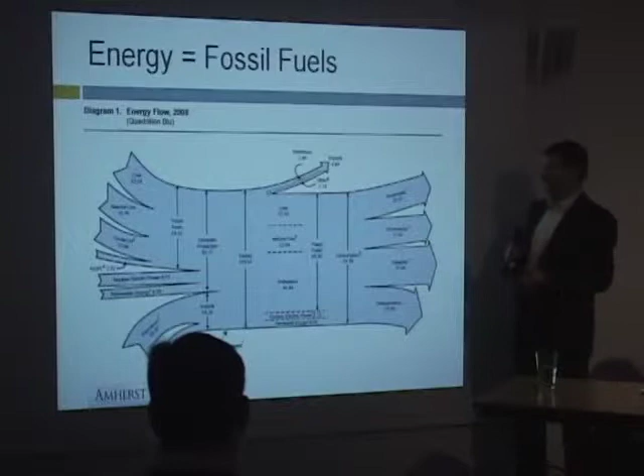Isn't this a lovely graph? This is the Department of Energy. This is our tax dollars at work. I absolutely love this thing. We could stare at this for hours, and I do.

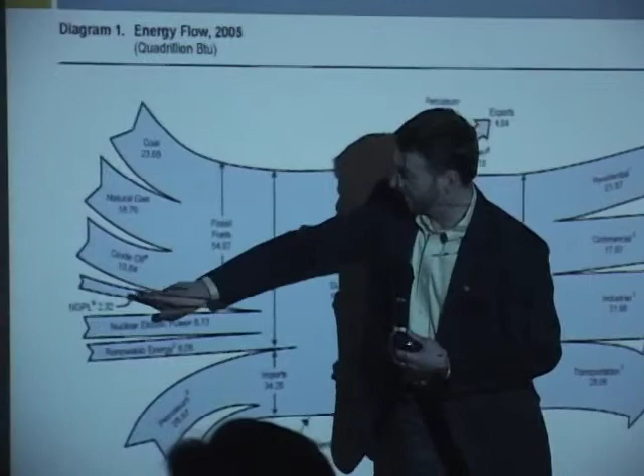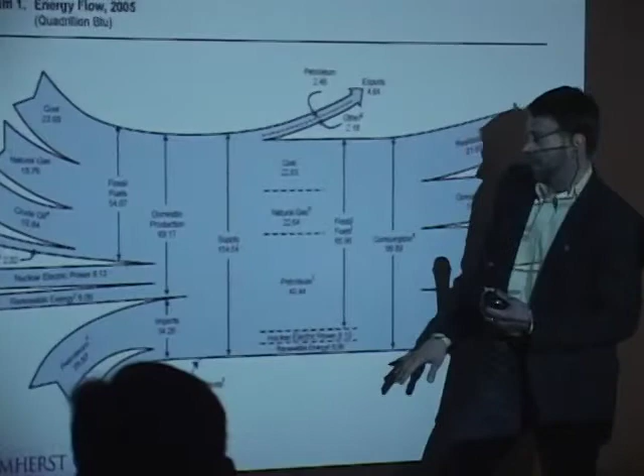But what this shows you is where the energy is coming from over here. These are all the various energy sources: coal, natural gas, crude oil, natural gas liquids. Nuclear is that little arrow there. Renewable energy is that little teeny thing right there. And this is petroleum down here. So this is domestic production, 70% of the input to the process, and that's imports. And then it shows where it's going.

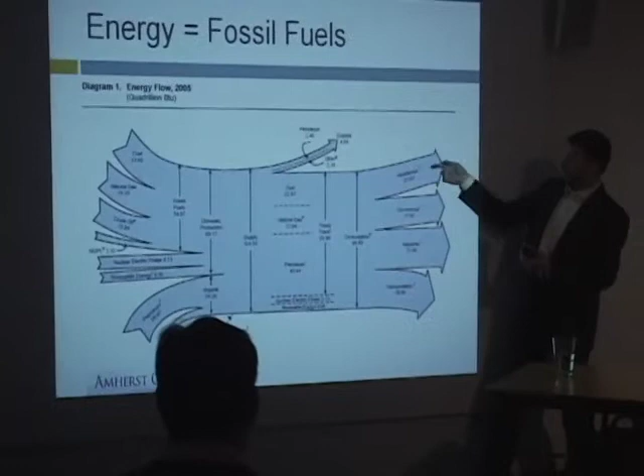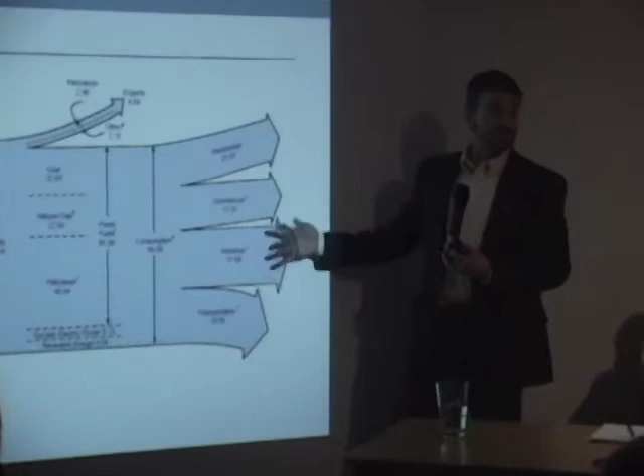Residential, commercial, industrial, transportation - that's what we're doing with the energy. Those four sectors are roughly equal, with industry being the biggest. We still actually make things in the United States, believe it or not.

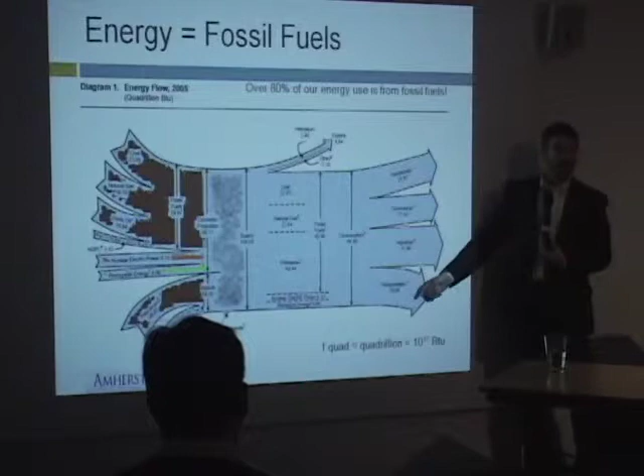But the important thing here is if you color the input, the brown part of the input is fossil fuel. That's kind of sobering - most of the input to our energy process, which does everything we want to do (live, work, make, move), is fossil fuels.

What do we use the energy for? If we take the right side of the graph, the output of our energy use in this country, there's those four almost equal sectors: residential, commercial, transportation, industrial. But most of those are buildings.

Residential, that's just about all buildings - that's your homes. Commercial, that's all buildings too, that's where we work. Industrial, a lot of that energy is maintaining the building the stuff is being made in. And transportation has no buildings, because most of our buildings don't move.

So when you really look at it, most of our energy consumption, 48% of it, is in our buildings. If we want to do something about energy, about greenhouse gases, we have to do something about buildings. I'm sure you guys already know that.

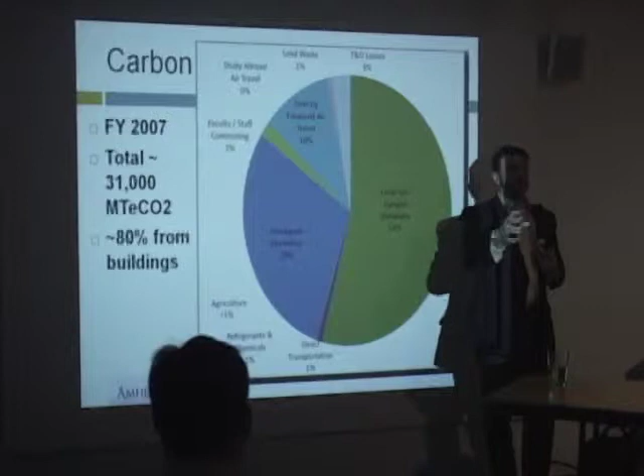This is what happens to the energy. Most of the energy we use, as you could see from that left side, is fossil fuels, hydrocarbons. So here's a quick chemistry lesson - I hope there are no chemistry professors in here.

Most of that energy comes in the form of hydrocarbons. We want the hydrogen - the hydrogen is what gives us the energy off it. We're left with the carbon. The carbon combines with the oxygen in the atmosphere and makes CO2, which is a greenhouse gas.

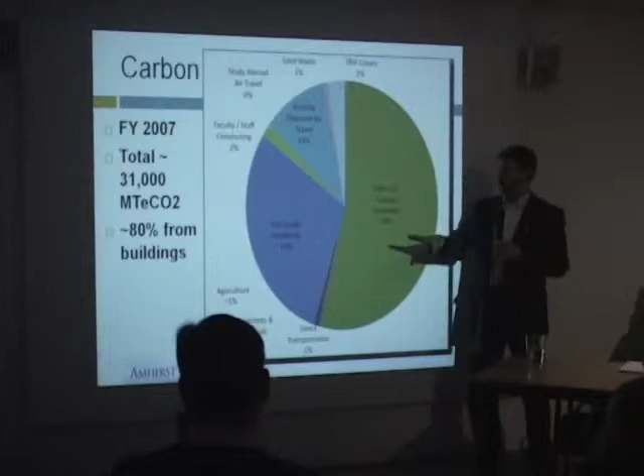This is our greenhouse gas footprint at Smith College: 31,000 metric tons of CO2 a year. It's almost impossible to visualize that, but let's just say 31,000 tons of a clear, tasteless, odorless gas is a lot. It's a big thing.

But most of it is from burning fuel on campus to heat the buildings - 54% of it. 29% of it is created by the plants we buy our electricity from. Everything else, all the little mowers and trucks driving around campus, is 1%.

Agriculture, meaning the greenhouse gases from the stuff we use to kill weeds and keep the grass green, is less than 1%. Escaping refrigerants and other chemicals is less than 1%. All the people who commute to Smith College from towns in the valley are 2%.

Our professors, who jet all over the world going to conferences in Tahiti and recruiting students from all over the world, that's 10%. That's big - that's a lot of jet fuel we buy. But most of it is the buildings.

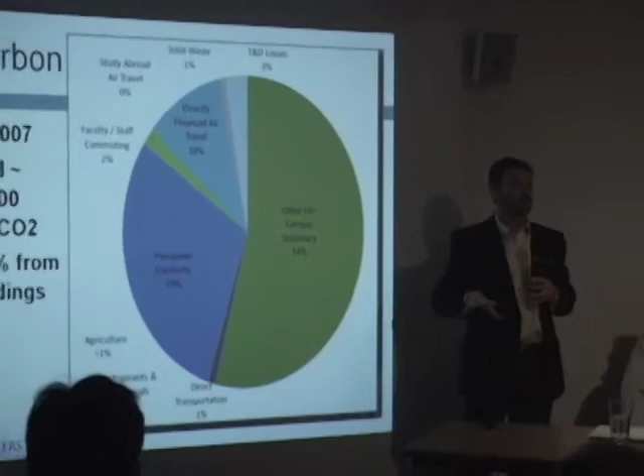So to do something about our greenhouse gas footprint, Smith College has committed to get rid of it all, to go carbon neutral. They have signed the American College and University President's Climate Commitment, which is to go carbon neutral. You've got to do something about your buildings primarily.

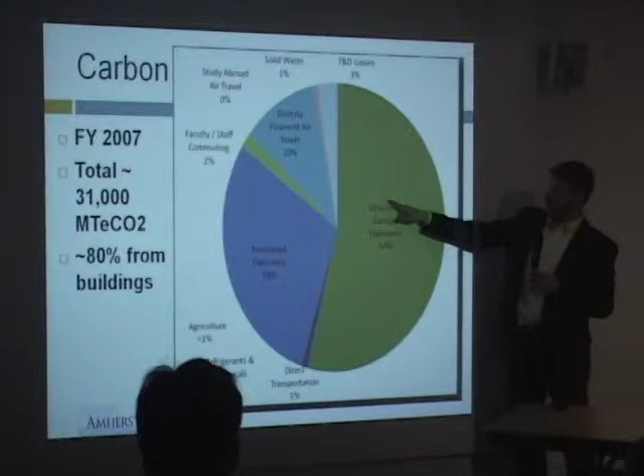So one of the things we do is green buildings. I'm going to switch things here and show you a quick movie, because the students I get to work with are far more talented than I am.

I'm Todd Holland, the energy manager, and we did some work in this building, the new residence hall. I'd like to talk about the solar hot water system and the energy-saving shower heads.

This is a LEED Gold certified building, the highest standard being platinum. Originally, the building was supposed to be silver certified, but we did so well during the design process that we got enough points for gold.

One of the biggest energy users in the building is hot water, and most of the hot water in the building is used for showers. A good portion of the hot water in the building is made by a solar hot water system.

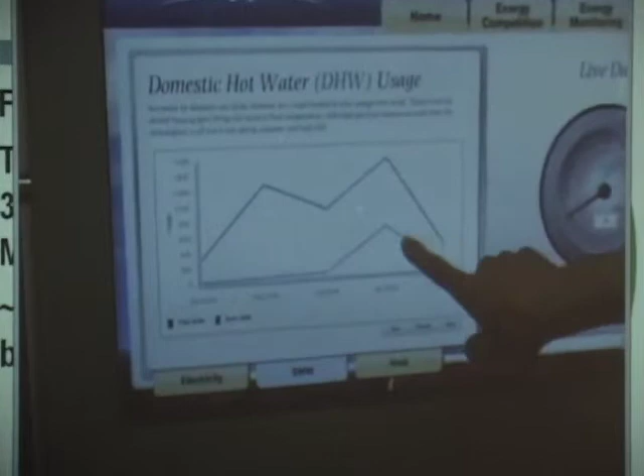There's 24 panels on the roof, and we can see its performance over time. On this day, this is the line - it was a sunny day a few days ago when we made about a little more than a third, almost a half.

I did all my own stunts. And you'll notice the camera work was nice enough not to focus on my helmet head after riding my bike to work on that summer day.

That's our newest residence hall at Mount Holyoke, which hadn't built a residence hall for years and years. The illustration there got a little garbled, but we have a solar hot water system on the building. That building at Mount Holyoke was our third LEED project.

The first LEED building was a science center, and a science building is an extremely heavy user of energy. In the category of energy and atmosphere, that building got only 2 LEED points, the prerequisites, and no more. So we learned from that and went after energy hard in the residence hall. It actually triggered a renovation of the Science Center, and we installed some of the features in the science building that were originally value engineered out.

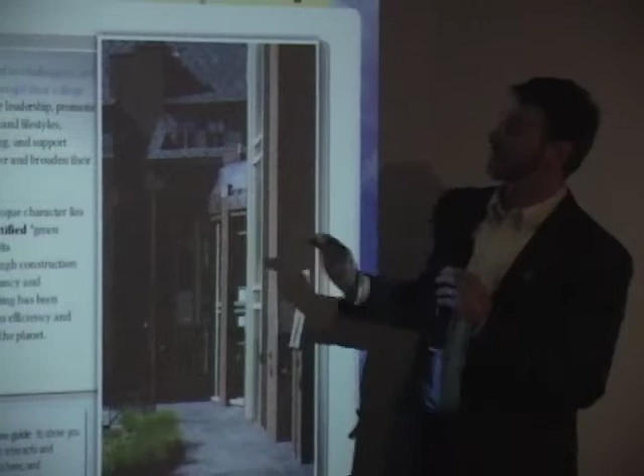Back to the building, I'll show you something else that didn't work too well. In the movie we have this little thing, our green touch screen. If you go into the lobby of that building, you see that nice touch screen, which actually doesn't flicker like that, that's just a video effect. This explains all about the LEED building, and you can go through and pull up any of these tabs.

We have an energy competition where we can compete floor to floor. It explains all about electricity, where the electricity comes from. You can read about the boiler plant, the boiler power, find out about the Mount Tom coal plant, see how much mercury that puts in the air here. But students don't use this thing, they don't care about it. I was really happy to write all this stuff and had a great time, but it really needs to be a little simpler. The basic idea is that this was a dashboard you could walk into the building and see how much energy we're using.

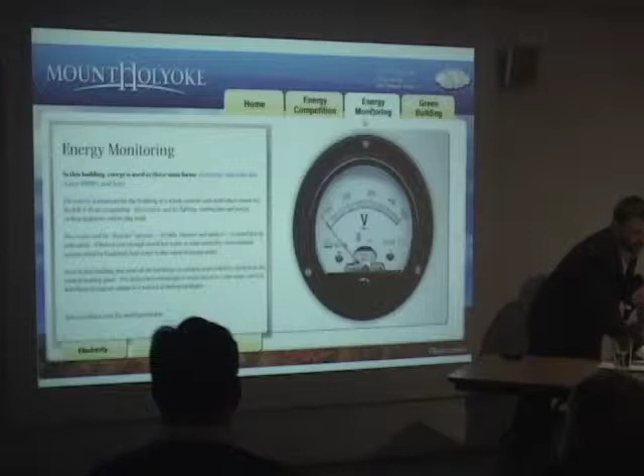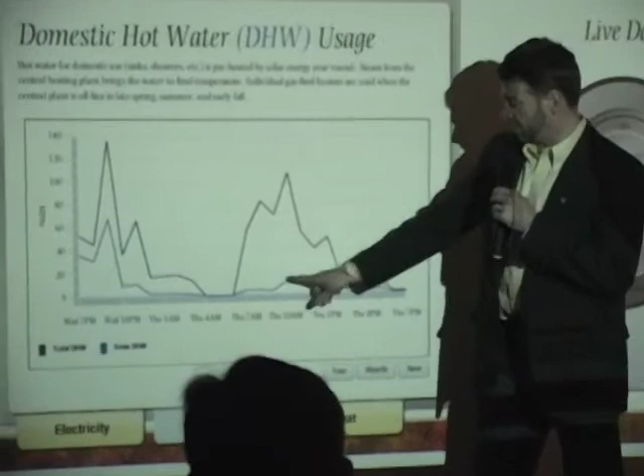So if we wanted to look at the solar hot water, we click on that tab, and this loads the screen shown in the video. It shows that yesterday we had a lot of sun, it was a nice sunny day. Today, not so much, a little cloudier. Wednesday we were using this much hot water, but we made that much of it, which is really nice. Right now we're not making any, really, we've got a little residual in there. But it also lets us find out interesting things, like dormitories in colleges don't really do much until about 10 o'clock at night.

And this is every day, and that's every system. Students shower at 10 o'clock at night, they turn everything on at 10 o'clock at night - that's when you really start cranking. This is kind of interesting.

That was my dream for this, that they'd want to go move the needle. But at Oberlin, they had an energy competition. They gave them the orb as the display device and told them nothing. I tell students you can find out how to change your light bulbs and put your computer to sleep, but they told them nothing. They figured out one of the biggest electricity users in the dormitory was the clothes dryer, so what did they start doing? They'd break into the dorm next door and do their laundry in the middle of the night over there.

So this was a lesson learned - over-providing. And back to the PowerPoint.

But the greenest building, I think, isn't building a new dorm - that's also kind of an ironic thing. Mount Holyoke really needed a new dorm. They didn't have any quote-unquote swing space, so if they wanted to renovate a building, they were forced to do it during the short summer months. Every project renovating 150-year-old dorms was packed into a summer and had to be ready by September. So as major issues came up - major mechanical retrofits, asbestos abatements and the like - they needed a place where they could put students and move them out for a whole year and spend a year fixing a building, which is something that Amherst College does.

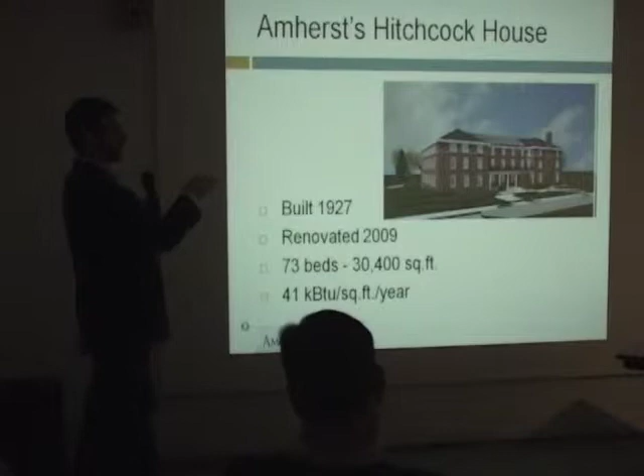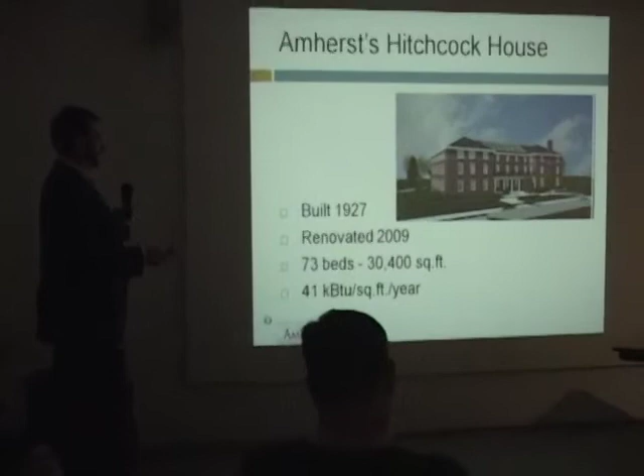The one completed this summer did quite a bit better. That's not a real photo, right Tom? Nope. Okay, yeah, there's no red keg cups on the front line. That was opened in September. It's a little bit bigger, 73 beds, but look at that - it's kicked the energy use down to 41,000 BTUs per square foot per year.

This is Mount Holyoke, and one thing really nice about Mount Holyoke is it came in really close to what the modeling said it would, which I was thrilled about. It was a brand new building, built from the ground up. It's a rather large dormitory, 172 beds, and that's down to 36,000 BTUs per square foot per year. But again, none of these places have kitchens.

But this is what you'd expect, right? If you took your house and took the kitchen out of the equation, maybe you'd cut almost half the energy out. This is how the building would have looked if we just designed it to code - most of the energy used per year would be space heating, similar to what you find in your house in the Northeast. Lighting and electricity makes up a good chunk, and then hot water for showers. What we got was 40% lower than code. That's pretty good, although I know Bruce and other people are making stuff that's 10% of code, so this is good, but it's certainly not in the realm of what's possible.

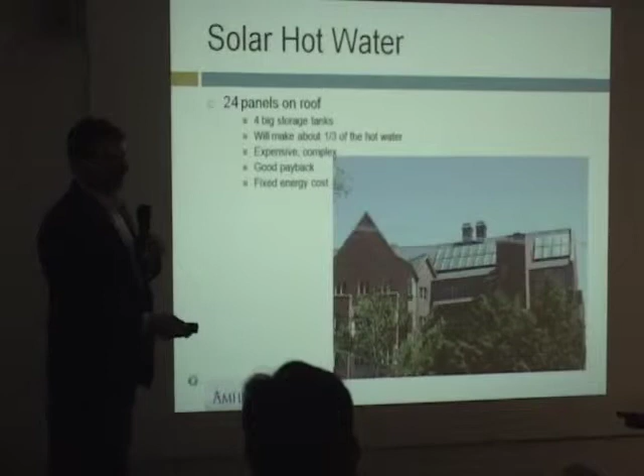Again, solar panels on the roof - the kind of green necklace that everybody wows over - but the real showstopper there is the shower heads.

Conway House, this was built in 2006. This is a small apartment complex for non-traditional age students at Smith who have families, so this is a real residence. It's an 11-unit residence, people living in there, and they have a full kitchen. So this is a real residence house, and that's down to 34,000 BTUs per square foot.

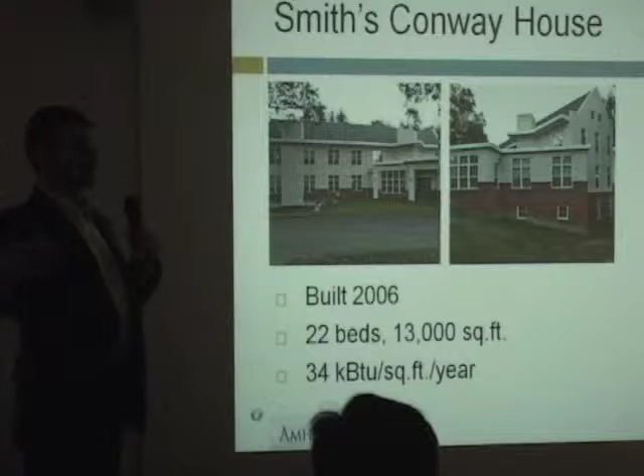This is a thermal vault. It's built with 12-inch SIP panels, which is a sheet of foam with plywood glued on either side. Really nice on this type of housing because the walls aren't hollow, so bugs and rodents have no place to hide. It's easy to seal tight, and it's really easy to hang a picture because it's plywood behind the sheetrock - you don't have to find a stud, which I'm notoriously poor at.

So that's down 34,000 BTUs per square foot per year. Just to go to some even more awful slides besides that first DOE slide, I made some really pathetic ones - never do this in PowerPoint.

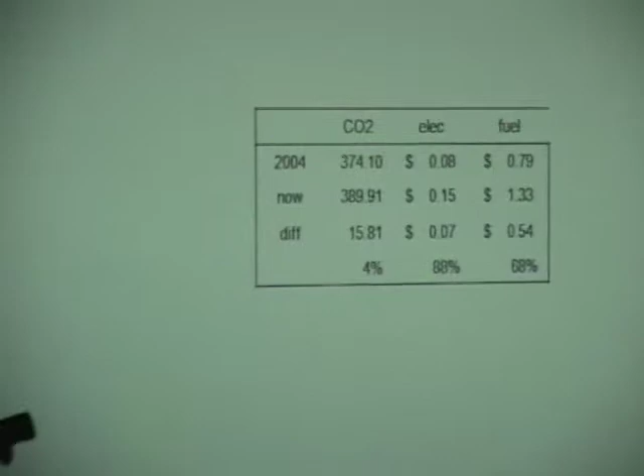So what's been going on since 2004? I've been at this a little more than 4 years. The CO2 in the atmosphere has gone up 4% - 4 years ago we were at 374 parts per million, now we're at 390. Electricity doubled in cost for the colleges, which was amazing. One thing that amazed me is it didn't make my work twice as important. Fuel more than doubled and has since gone back down - back when I first started we were paying 79 cents a gallon for the ugly, dirty fuel oil we burn at the colleges. Can you imagine that? Now we're paying $1.33 a gallon. So electricity almost doubled, and fuel has gone up by more than two-thirds.

What else has happened? This is very interesting. Notice the difference between BTUs per square foot per year average on the campuses - at 185,000 BTUs per square foot per year, paying attention to the residences, which are well under 100, is probably not where the treasure is. Amherst College has dropped their BTUs per square foot by 14,000, for an 8% reduction. Mount Holyoke has dropped theirs for a 6% reduction, and we're doing a lot more than just building green buildings or retrofitting the spaces we have. Smith has taken a whopping 16% reduction in BTUs per square foot per year.

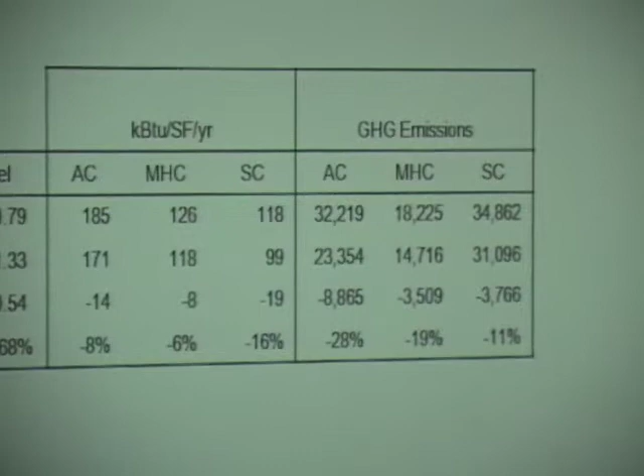What's happened to the greenhouse gas emissions? Amherst College has reduced theirs by 28%, only spending money on things that make money. A lot of that is cogeneration - we're making electricity on campus now. Instead of throwing away the heat like a power plant does, warming up the Connecticut River, we use the heat on campus. Mount Holyoke has reduced their greenhouse gas emissions 19%, and Smith has reduced it by 11%. So it's not all green buildings - most of it is doing other things: finding where the power is being used, finding egregious waste of power, and retrofitting the buildings we have.

Thank you, Todd. That was great. How do we convince people to change the way they live? That's one of the big questions, I think.

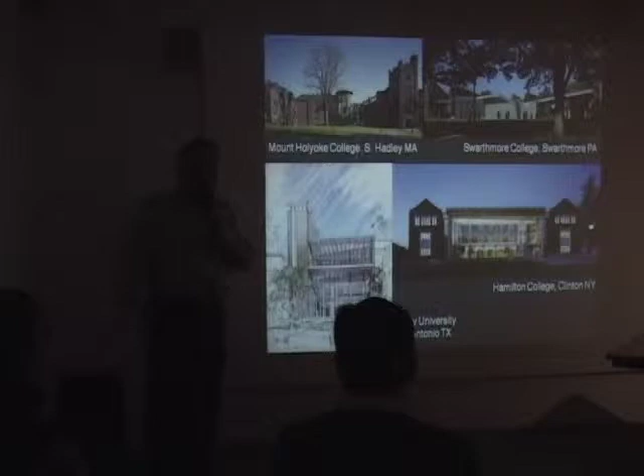These all have something in common, although as you can see, they are very different buildings. First, they're all reshaping of existing buildings with major insertions of new construction. Secondly, they're all between 100 and 200,000 square feet in size. Thirdly, they all have a green agenda, and it's a different green agenda in each case, and I'll talk a little bit about that. But most importantly, they are buildings for learning, buildings that are intended for the learning of science.

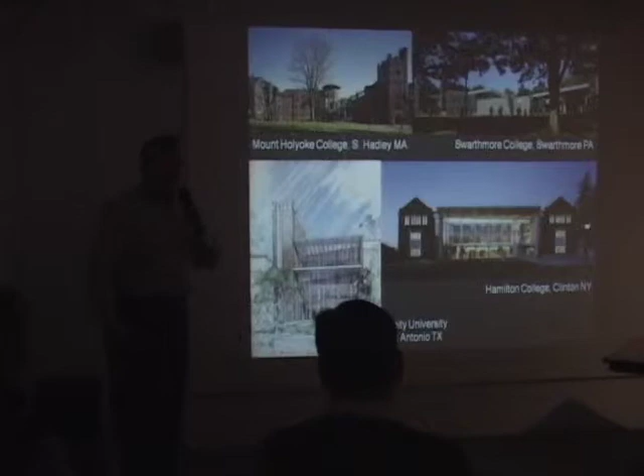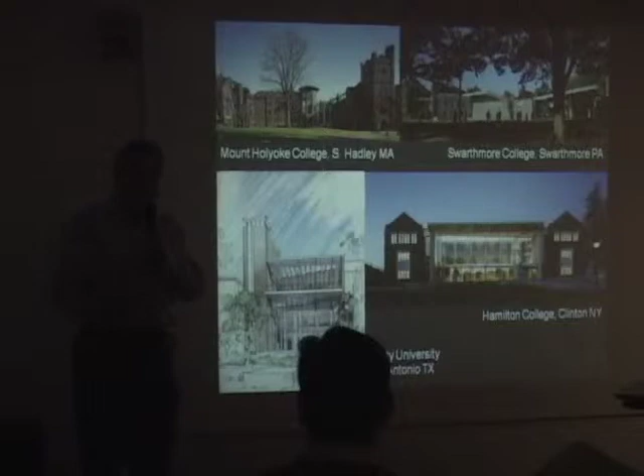And what does that mean? The learning of science and science itself has changed quite dramatically in the past 50 years since most of the original buildings were built. Most of them were built between 1930 and 1960. There was, of course, a big building boom in college campuses in the 50s and 60s after the Second World War.

But science has changed in many ways. Firstly, science was considered in the mid-20th century as disciplinary: physics, chemistry, biology, psychology, and so on. Nowadays, all of the advances in science, or most of them I understand, are at the intersection of the disciplines. So interdisciplinary work is a vital part of modern science. Think of neuroscience, think of biochemistry, think indeed of environmental science. So these buildings are intended to bring the sciences together.

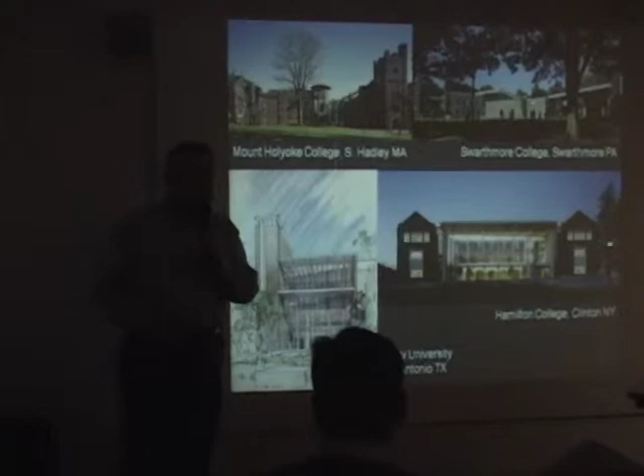Secondly, science is learned in a different way nowadays. Students learn not by doing what I did when I went to a lab in University College Dublin a long time ago in the 1960s, doing a prescribed experiment laid down by a professor. Nowadays, students learn by discovery learning. They are doing experiments themselves that they are thinking of, and they're imagining what the implications of what they're thinking of will do. They're learning by trying and by experimentation.

They work in teams rather than individually, and often interdisciplinary teams. So creating places for people to work together is a very important part of science.

Science has changed because the emphasis on safety is great now, and therefore the emphasis on ventilation of buildings, particularly chemistry buildings, where the science is about handling what are volatile organic compounds. So the building must be ventilated, and as Todd said, they're great energy users, therefore the opportunities for saving are great.

Finally, just as in every other aspect of our lives, information technology has a huge impact on the learning of science. Instrumentation has become very sophisticated and available to almost every institution, quite sophisticated scientific instrumentation, and of course all the obvious ways that information technology affects our life.

So I gave myself a challenge because I said I'm going to talk about 4 buildings in 15 minutes. Meg told me she was going to be forgiving about the time, but I think I owe it to her to speak fast, so I will continue to do so as much as I can.

First, and one last thing: the program on all of these buildings is basically the same. This is the basic program of an undergraduate science building: teaching laboratories, research laboratories, offices, support, instrumentation, and classrooms, all tied together by perhaps the most important space in the building, which is the social space. The design of that social space is just as important as the design of the laboratories or classrooms, because that's where the students learn from the faculty, learn informally, and do a lot of their work, as you will see.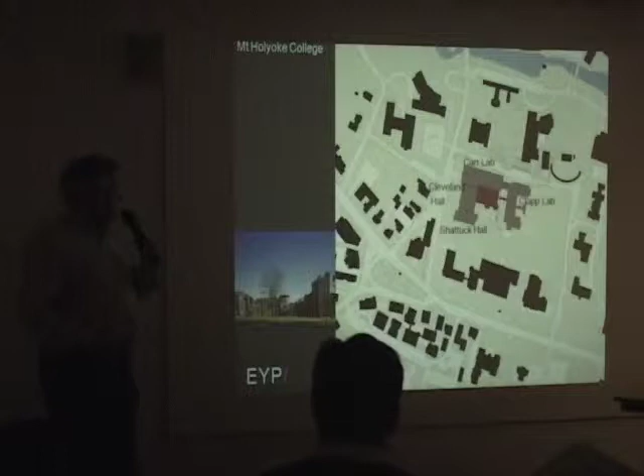The red rectangle encloses the new construction, which primarily consists of the atrium, the central space that ties the whole thing together. A lot of the renovation money went into the

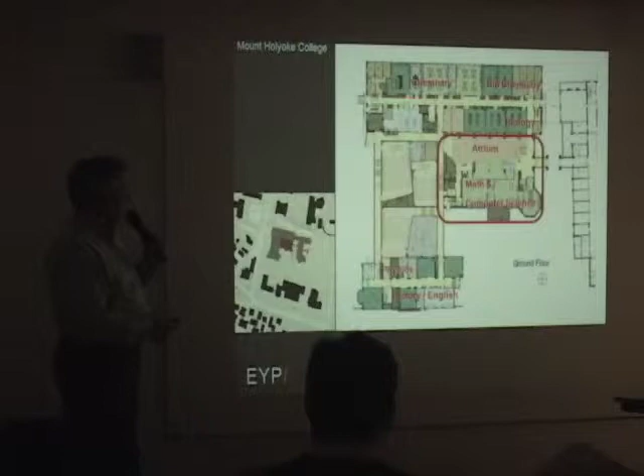chemistry laboratory here. This is the atrium, which is very tall and narrow because it had to link all levels of all the buildings. Clapp Lab, which you can see through the window in the distance, was four stories, so we wanted to link all levels because we didn't want to leave anybody isolated from the central social space.

The other lesson about this space was it needed to be very active all the time. It needed to link with all of the other activities going on in the building—you can barely see some windows looking into the chemistry building here, and all of the space on this side is activated, so you can always tell there's things going on. It's a very important space, the heart of the science complex now.

We also made some overt efforts to learn in the building. This is in the linoleum floor—we cut in the solar system, so it makes a connection, a little bit of learning.

Here we cut in a diagram of a neuron. Apparently this is a firing neuron, and there's a trailing nerve that runs all the way down the corridor past all the offices and labs. Again, it's sort of a diagram of science on the floor of the building.

In the renovated chemistry building, we were short on space and the ceilings seemed very low, so we eliminated hung ceilings in the lab. That gave a slightly better feeling of height, and practically, it allowed access to the ductwork and conduits above. It also helped students understand the amount of energy going into this building as they look up and see these pipes, ducts, and wires—this huge amount of things happening to make the study of chemistry possible.

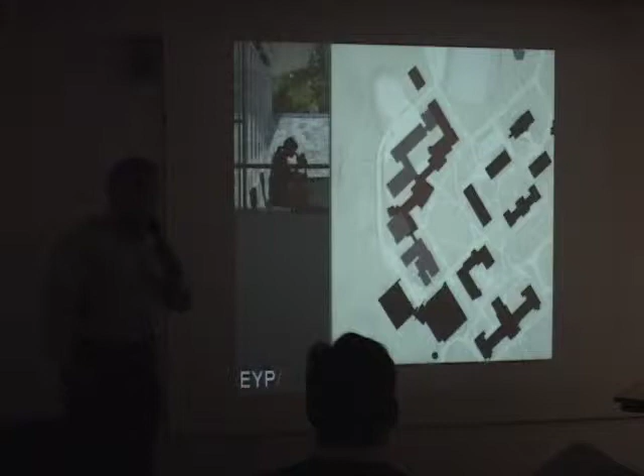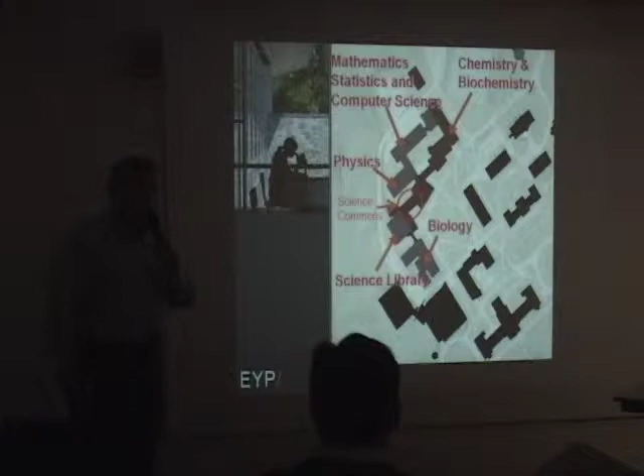This building served all the different science disciplines and connected them to one another, and also had a science commons—a social space analogous to the atrium at Mount Holyoke—in the center, the kind of center of gravity of the space.

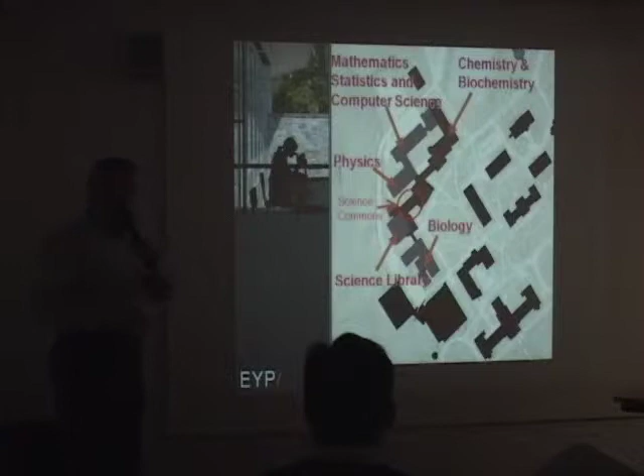You saw on the site plan there's lots of courtyards and ins and outs in the building, and that was very conscious because we were trying to connect the building to the outdoors, so no matter where you were in the building, you had a very strong connection with the outdoors.

There was an outdoor classroom, a number of these actually, and we also celebrated the natural rainwater coming down. Rather than sending it in a pipe, we put it in a channel so you could see the water coming down, and then it would go into a cistern where it was used to irrigate the campus. Even in the internal classrooms, large, simple classrooms with large windows, you had a connection with the outdoors.

And most of all, in the science commons, it had windows on both sides, so again, strong connection with nature. But also a very important place, the sort of heart of the building.

In this place, we also had an energy monitoring system, and the faculty was insistent that this was not going to be a digital readout, but rather dials, analog dials, so that you could understand the scale of what was happening. You weren't just reading numbers, but you were actually seeing the needle move up and down, and you could tell whether you're just moving 10% or whether you're moving that much.

This also gives you an idea of, if you are going to have an energy monitoring system, what are the units you're going to measure, and how are you going to measure them, and how is it going to be effective enough that it will be useful.

My observation is, and this is not a scientific study by any means, that these kinds of things are useful if they are connected with some kind of a curriculum. If they're just in the lobby for people to see, people look at them and yes, they're interesting, but I'm not sure they really react or respond or are really effective. We can discuss that afterwards, and perhaps other panel members have ideas. But this was an interesting version of an energy monitoring system that is fairly unique.

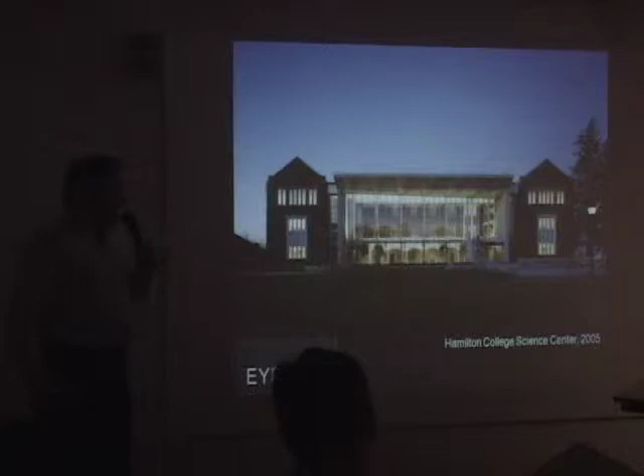Moving on, another science building in Hamilton College in upstate New York. Here the green agenda was again different, driven by the Board of Trustees. We started with the existing science building that needed to be reshaped, reformed. It wasn't serving the needs of modern science, it was forbidding and people didn't like it, and it obviously needed the normal upgrades that buildings always need at this level of age.

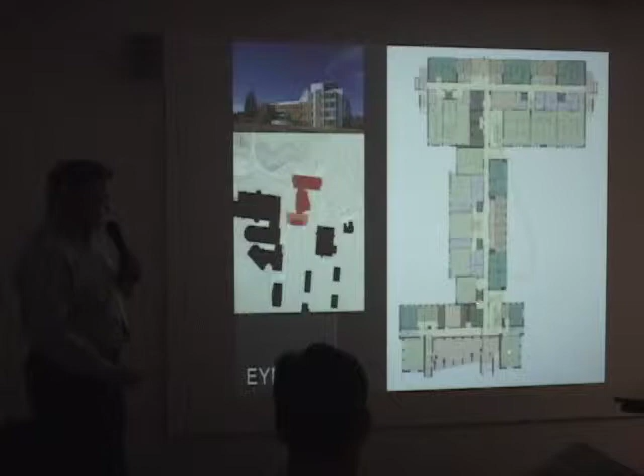We proposed to the board that we consider LEED certification. They were a little cautious, but they did want to make a green move in the building. This is part of a very big complex, so the existing building is just this piece in the front. What they decided was that the atrium, that little red piece there, would become an energy showcase.

What we did was design this atrium, which was inserted between the gables of the existing building, designed to be an energy showcase. I'll talk very briefly about pieces of it here. First, a big solar peak to keep out the summer sun. It is south-facing, and inside there's a double curtain wall.

From here up, the double curtain wall with the space between the two walls is used in the summer for gathering the solar gain heat and bringing it up and exhausting it, and in winter to gather this heat gain from the sun and recirculate it through the building.

But perhaps interestingly, at the end of the atrium there's an energy kiosk. You can see a picture of it here that explains the way the atrium works. It also explains the energy the building is using and does all those same things that Todd was talking about recording. The feedback is that this little feature in the corner of the building is interesting for visitors who press the buttons and look at it. Students mostly ignore it - they maybe look at it once or twice, and it's not incorporated into any curriculum.

So I think it's something to talk about in the discussion, the usefulness of these kinds of techniques. However, this building has had a very interesting impact in Hamilton, in that the administration and the Board of Trustees have realized the importance of environmental considerations in design of buildings. Although this building wasn't LEED certified, the three buildings they have built since then have been LEED certified. So it has been helping educate not just students, but all of us, in the importance of these considerations.

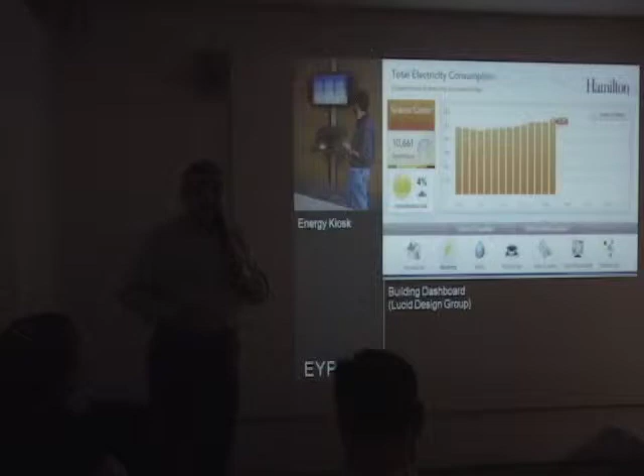Also, Hamilton has recently installed another kind of energy dashboard, this one by Lucid Design Group, and you can actually go online - I'll give you the reference afterwards if you want to see it. I did it myself yesterday. A number of colleges have installed this particular kind of building dashboard, and it measures electricity use, water use, natural gas. If there are renewables, it'll tell you the contribution renewables are making towards the energy consumption of the building. I think all of these kinds of techniques are important for us in the future, to help everybody have access to the information you need to understand the impact you're making if you do make reductions or changes in how you use energy.

I want to move quickly into the last project, which is at Trinity University in San Antonio, Texas. Now this is a very different story, about regional environmental characteristics. San Antonio is in the south, in dry desert country, but it owes its existence to the springs that are fed by the Edwards Aquifer.

The Edwards Aquifer is a large aquifer under about 15 counties of south central Texas, used for artesian wells and for providing that part of Texas with water. Now, we all know how important water is in the survival of human life on Earth, and indeed all life on Earth. But the aquifer is in limestone caves, limestone deposits all through that area of Texas.

Now, limestone, of course, is a carbon sink created by organic matter that's become solidified. And so we thought that here in San Antonio, there was a big opportunity in this new building we were designing for Trinity University to think about these big regional things, the importance of water, the importance of limestone, and incorporate that into the building, particularly because

Trinity's campus is actually on an old limestone quarry. So we were inspired by some of the missions of San Antonio, which have these interesting limestone walls with arches in them, which reminded us very much of the famous Pont du Gard, the Roman aqueduct in Nîmes in the south of France, which you see on the left.

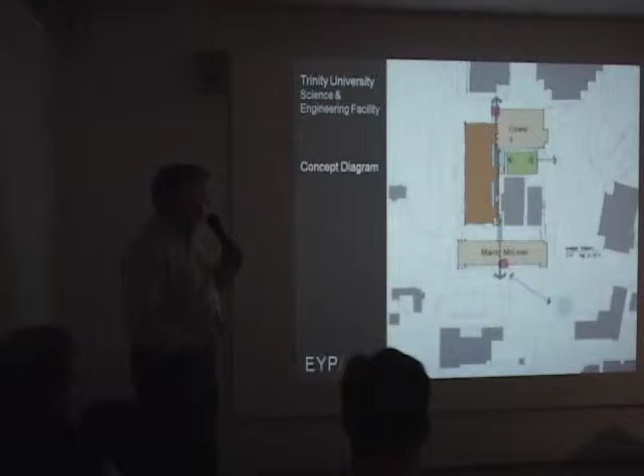And we said, what about running an aqueduct all the way through, made of limestone, to form that social space that connects the whole thing together? And what about making it an essential part of the entire building?

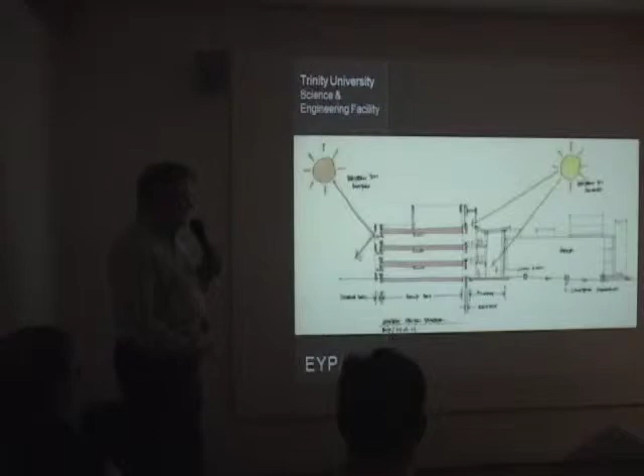So here it is. This is the sort of takeoff on the aqueduct. It's a big limestone wall that runs the entire length of that link that links all these buildings together. There'll be laboratories and classrooms opening off it. It has bridges on several levels so that you can see into the activities.

And also there'll be an opportunity for each of the different science disciplines to have a display showing how their particular discipline relates to water or relates to limestone or both. For instance, the biology department could have a display of fossils. They could explain the formation of limestone. The geology department obviously could do something else. The physics department could have something to do with hydrology and so on.

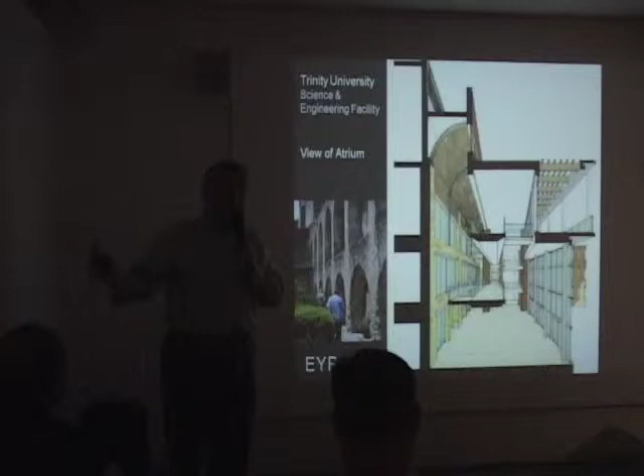So this is still unbuilt and we don't know what the lesson is, but I think it's an interesting approach because here we're not talking about individual uses of energy. We're talking about some big environmental learnings that can be incorporated into the very fabric of the building.

So that is a quick tour of four different science buildings, and thanks for your interest.

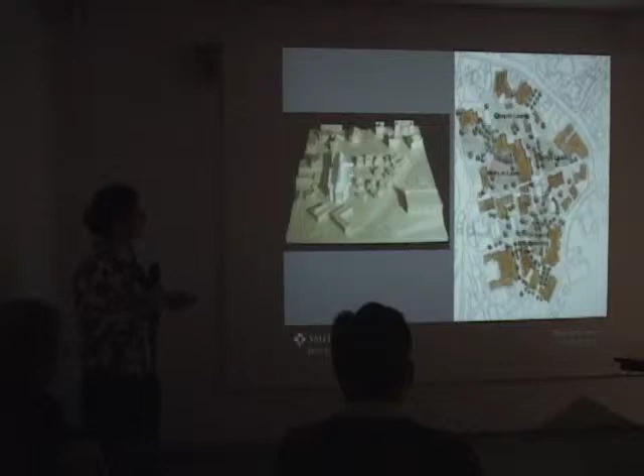And then we're going to highlight two actual sustainable strategies that were implemented at Smith. If you know anything about the Smith campus, it's really set up along the lawn concept, not the quad or orthogonal arrangements you see on other campuses, but on the lawns. So when we were asked to design a new building extending campus southward, it made sense to extend that lawn concept, that issue of green, placing buildings with their entrances on the lawn, on the green space.

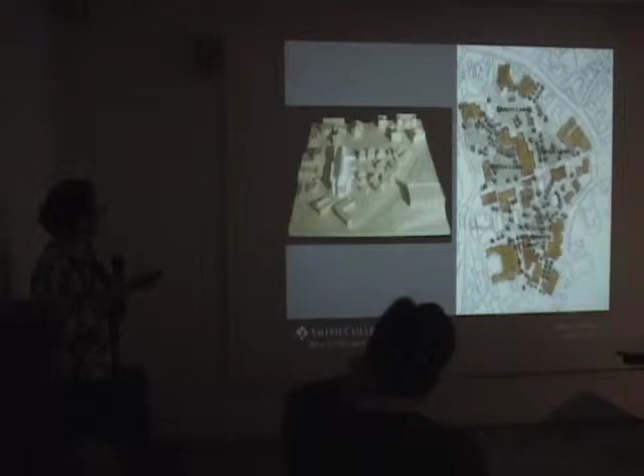You'll see if you've been down there that the green hasn't formulated yet, but it may in the future. In the meantime, inserting a building that houses science into a campus takes some good thought and sustainable strategies in terms of smart growth principles, placing buildings where you get the highest and best use of your land.

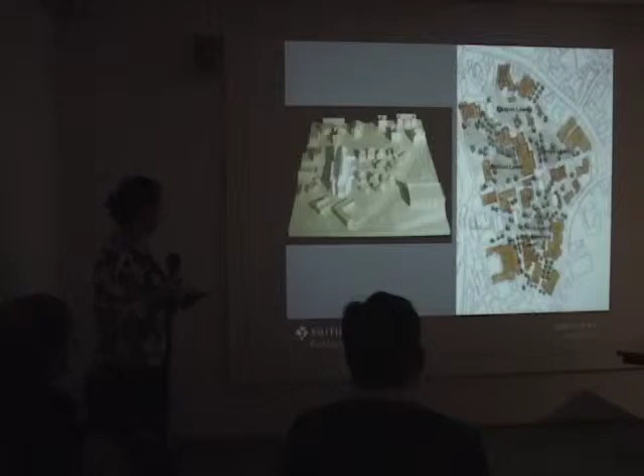So how do you start on a sustainable project? What we suggest is a sustainability charrette, and we like to do that off campus. Let's get all the important stakeholders to a neutral site so we can really focus and think hard, throwing out all the ideas into a lot of good brainstorming about the possibilities for a sustainable building.

So we went to the Center for Building Performance at Carnegie Mellon University, headed by Vivian Loftness, who was our leader for this charrette. Vivian herself is really a researcher at the forefront of good workplace design and sustainability.

So we met in their facility that BCJ helped design, the Center for Building Performance. We brought along the architects, our mechanical engineers, site designers, landscape architects, and the client, folks from Smith as well, to just brainstorm a lot of really good ideas.

So what did we think about and talk about for a whole day? We threw out a lot of things, some maybe crazy ideas, some good ideas at the time that we knew we couldn't implement.

But we focused on ideas of light, of air, of thermal issues. We talked earlier about creating buildings now with good envelopes or skins, your walls, and how you can really work to insulate buildings well so you have less demand on your heating and cooling systems.

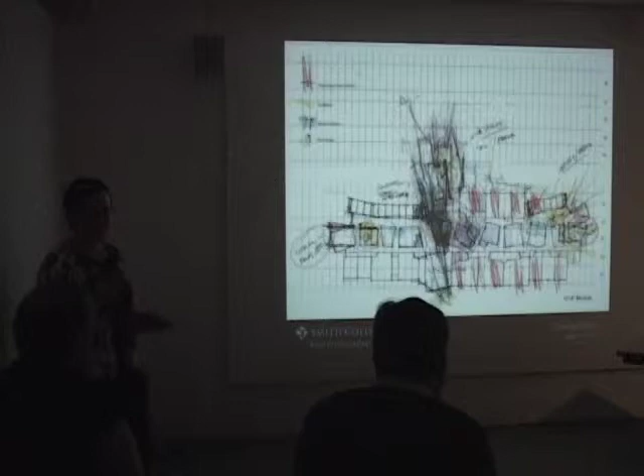I like to show this slide because it shows a little bit how architects think after coming out of a charrette like that. We spend a whole day talking to the client and writing on boards, then go back to the office and do drawings like this. You can start to see the beginnings of a floor plan, with rooms and circulation, and we're thinking about light and green spaces, sunlight coming in, and opportunities for solar or photovoltaic panels. Right away we're excited about how these ideas will be manifested in the architecture.

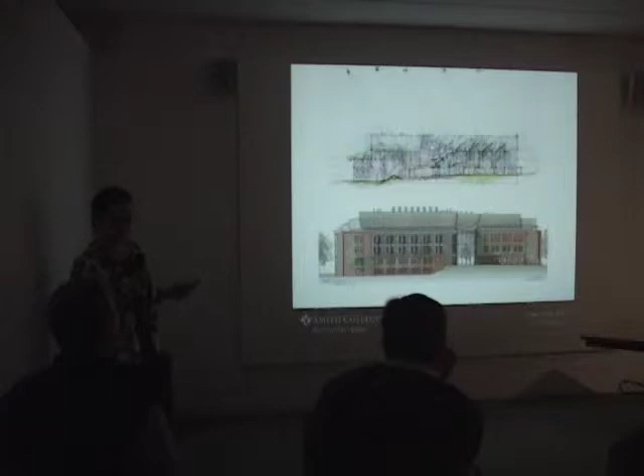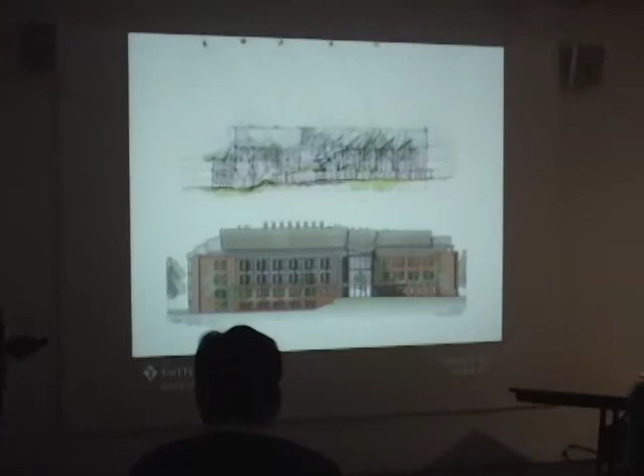Now we're stepping a little ahead in the game. We're still thinking about sustainable strategies, but now looking at what's starting to become a building. Where are those big points where light is coming in? Where are the important people places, where people will gather? Where are we thinking about planted roofs, landscaping, green spaces, trees? Where are we going to house important mechanical equipment, heat recovery systems, and whatever else is going on in these buildings? And then an elevation representing pretty close to the final attributes of the building.

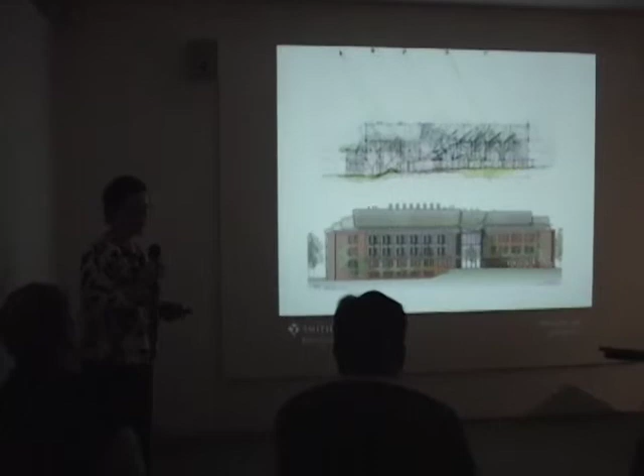So Rob's going to talk a little bit about the importance of our big windows.

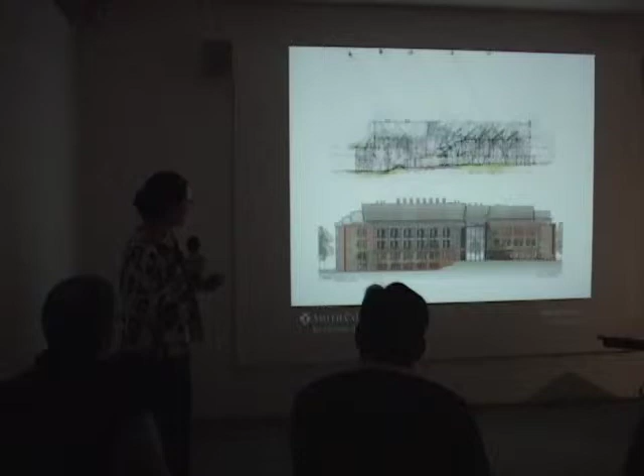Some opportunities here—we're still hoping, if anyone has extra money they'd like to donate, we have a nice place for some solar thermal arrays or photovoltaic arrays. We're all set to go. So if you're looking for an opportunity, there's a really good one down at Ford Hall.

So much of the sustainable strategies and systems you put into a building, unfortunately, you can't always see them. They're in mechanical rooms, in the walls, in the insulation, in the kind of glass you select. They're in heat recovery systems and other mechanical systems we put into the building to save energy.

But there are a couple that are visible, and Rob will spend a few minutes talking about that. One we have at Smith is how we manage our water systems, and the other is how we manage our daylight and lighting systems.

Thanks. So the early soils reports for the project, well before this was ever put to paper, we found we had an enormous amount of groundwater. Because this building is sitting in basically a bathtub of water, we needed to manage that. Not unlike most foundations where you have a perimeter foundation drain, we needed to take this water and collect it somewhere.

Coupled with the fact that we've now placed a 35,000 square foot footprint on this site, we had to address an enormous amount of rainwater collection. We're looking at a site plan here—Smith's campus is to the north, which is to the left of our slide.

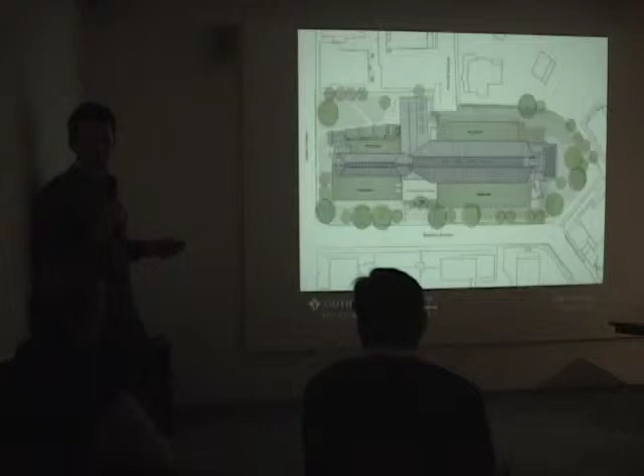The issue with the green roof, and I mentioned this, the groundwater, excess groundwater, was that trying to collect all of this stuff and deposit it back into the city municipal system was too great. We couldn't afford to do that. So one way to mitigate that is with the green roof. After detention within the green roof system, absorption by the plant life, and just general evaporation, it reduced a significant amount of the rainwater runoff load to the city system.

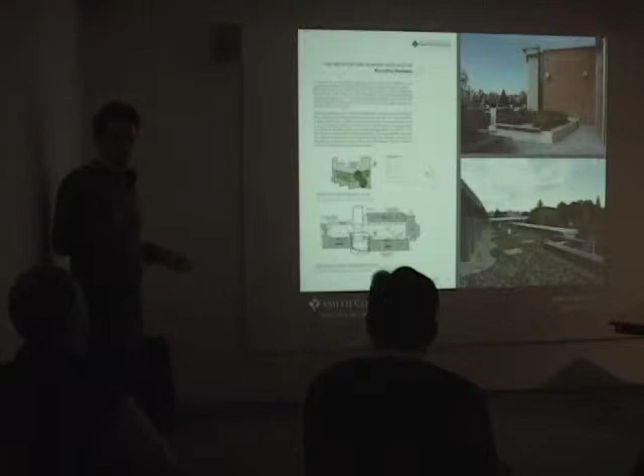So where was I? It comes from the 30,000-gallon tank, comes through a filtration system, sits in this 5,000-gallon tank, and then as needed gets run through a booster pump system and fed back through toilets, urinals, and lab sinks, most importantly. So all of the lab sinks are labeled as industrial water, technically non-potable.

The groundwater source at the time, as it's collected around the building, is basically well water grade, so it technically is drinkable. There's probably a good qualifying statement here in the sense that this is a fabulous idea, and it's an enormous savings of water, projected at somewhere in the 40 to 45% water savings of what the building would normally use. But they are having issues with it.

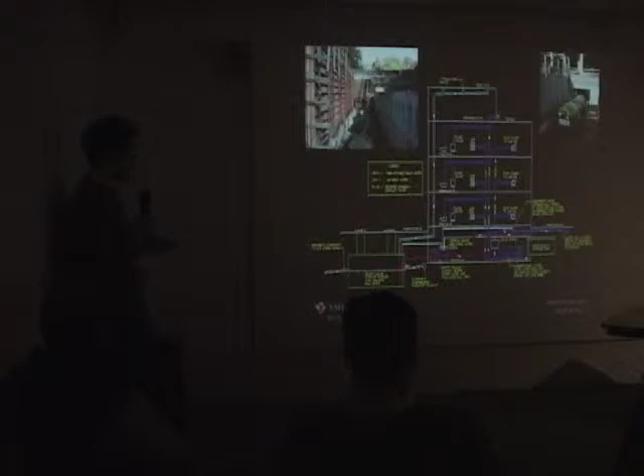We're trying to find the source. It turns out that the 30,000-gallon storage tank, which is actually collecting the water from the ground and from the roof, is exactly as we anticipated, actually cleaner than what's actually making it into the lab sinks. So there's some point between the storage tank, this 5,000-gallon tank, and the actual end user. Something's happening there. We're in the process of working through that.

So this piping system, as it comes into the building, this gorgeous mechanical space, is all painted purple, namely because it's a code mandate. So future renovations, people coming into the building and facilities, they don't inadvertently tap into the wrong pipe when they're hooking up a water fountain. But it is a nice map of the building as you're living in the space.

It comes up through the mechanical system, and occasionally throughout the building, and in particular labs where there are no ceilings. I took this photo this morning. It's particularly poor.

You can see how it comes down the main trunk of a corridor and then drops down and jumps into your particular building. And in cases where, in a room like this, you can actually see it dropping down into a utility chase, to a tap that you can hook up your experiment to.

A nice teaching tool.

So the next is a bit more on daylighting. Here's a more clear plan of the space. Like I said, it's a 35,000 square foot footprint, roughly 142,000 square feet in total. The building spans almost 330 feet in length.

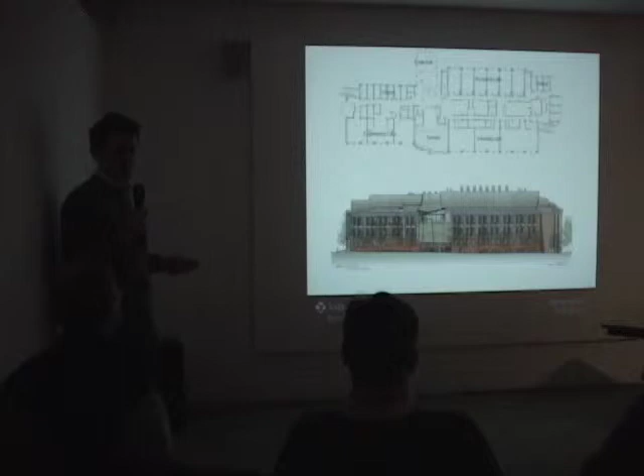But in order to scale the building down, ironically, I think it's effective by making the windows more appropriately scaled to the elevation, which actually equates to quite enormous windows. Some of these labs have 8-foot by 10-foot tall windows in each of them, on average.

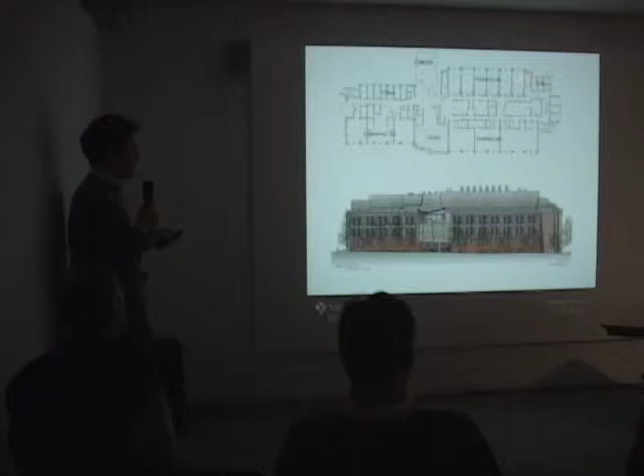So the south exposure of the building - let me go back to the plan here quickly. South being to the right, and a very intentional purpose in the daylighting strategies was to splay out these walls and maximize the daylight into the offices, into the corridor, and stairwells.

So here's a view of that particular corner. You can see the Great Hall in the distance on the east side, and then these walls splaying out. The sun here is probably something like 3 or 4 o'clock in the afternoon.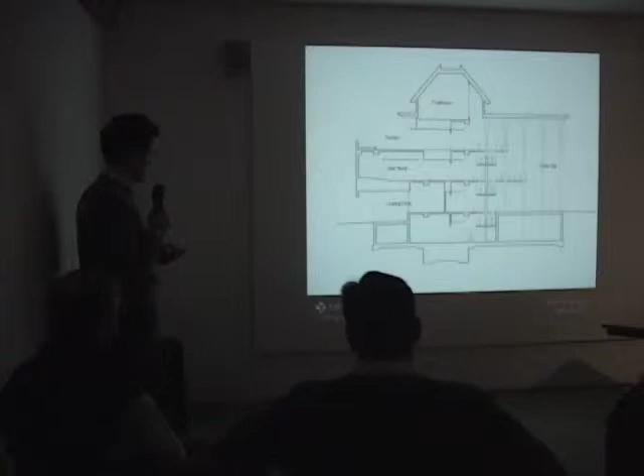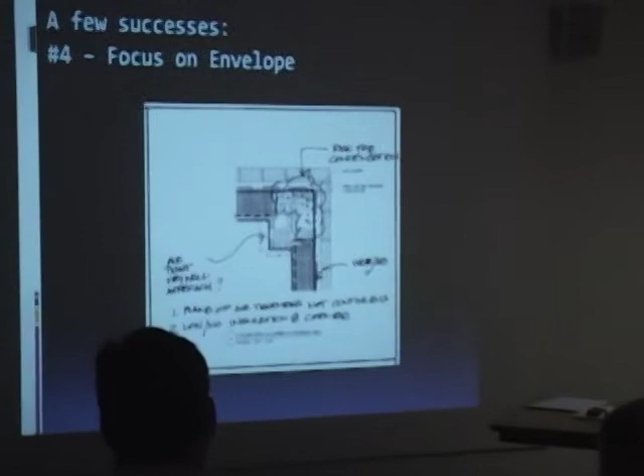The next thing we've really been getting into the last couple of years is focusing on the envelope. There are experts here who know much more about this than I do, but I'm learning, and it's really important to know a lot about. If you haven't been to talks by folks like this guy sitting here and other experts out there at NESEA or elsewhere...

Virus database has been updated. Who knew? Wow, that's good. We'll look at that later. That was really good.

So building envelopes aren't as exciting as that, I guess, but really getting into this and learning a lot about it, bringing a lot of focus to it, holding our consultants' feet to the fire - this is what makes the difference. It can make an enormous difference: air barriers. If anybody hasn't done this on their home, call up WMECO, make an appointment, get CET to come over and do an analysis - they'll fix things for you and save you money.

It's the same kind of thing, focusing on the envelope. We've been working with one particular consultant who's been amenable to dropping by for an hour when he's in town to look at drawings - it's been terrific. We've really been focusing on that, doing things with foam insulation, and when we come across weird black stuff in the back of a wall, wondering, can we insulate that, or will it create a vapor barrier situation that makes the wall disintegrate from the inside out? We're figuring these things out and moving along.

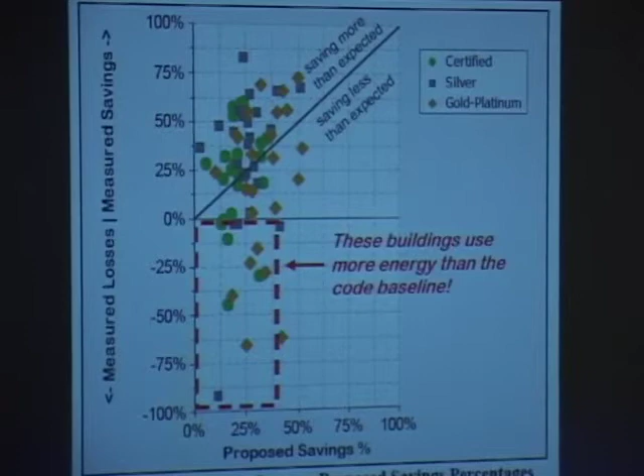So we're avoiding that. That's good, and we're actually not following the whole LEED thing. I'll talk about this briefly. Todd mentioned that over at Mount Holyoke, the energy modeling actually predicted what actually happened. That's incredibly unusual. There was a study done a year and a half ago or so—it's kind of a scatter diagram mapping what was supposed to happen with LEED certified buildings versus what actually did happen, and it's all over the place. In fact, the ones underneath the line are using a lot more energy than even the baseline, much less what is supposed to happen. So something's not quite right there.

All right, next topic: follow the money. It just so happens that a lot of campuses aren't building very much right now, so we've been able to focus on other things. When you think about it, the new snazzy green construction, optimistically, is maybe 20% of the gross square footage on campus—really it's less than that. Say they use half the energy per gross square foot of the older buildings, which is terrific—that's 10% savings, yay, we can all be excited. But it means 90% of building energy use is these older buildings that aren't going to be renovated anytime soon. They're not going to be LEED certified, not torn down and rebuilt. They're going to be there, as we've heard, for a long time—buildings last a long time on campuses. So that's a good place to focus.

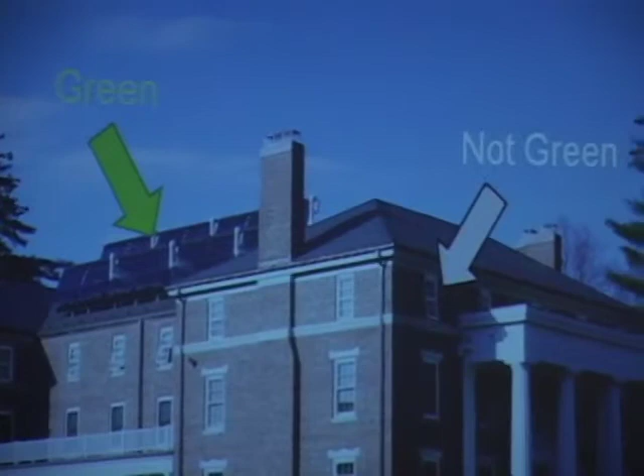So, okay, well this is great because look, the faculty keep their windows closed. That's great, so the adults know better. That's nice to see, but not really. Again, it's optional, kind of like driving. What do you drive? You can feel good about driving a smart car.

Oh, right around the corner as I walked around here, I didn't take a picture because they're big guys. It looks kind of scary. There are 2 Escalades with diplomatic plates at the admissions office with big guys standing there. I wasn't going to take their picture, though I thought it would have been a good juxtaposition.